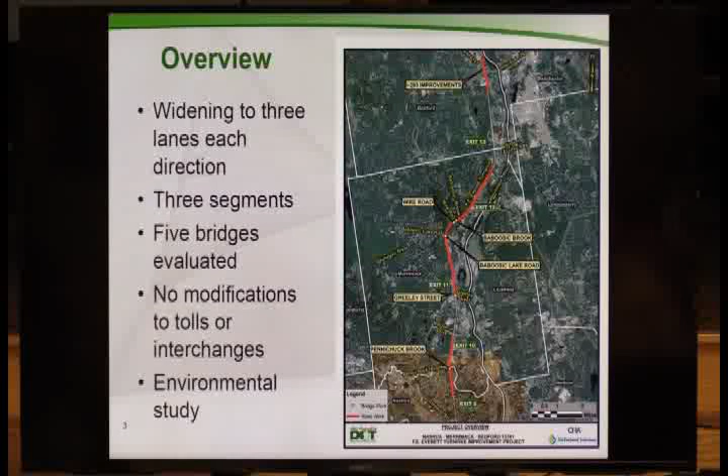That would be from exit 10 to 11 and in the exit 13 area. So the goal of the project is to improve the mobility throughout the corridor. The Everett Turnpike in this area, or for the whole state, is a major north-south corridor for daily commuting, for weekend travelers, and for just the goods and services that pass up and down. There are currently areas where the level of service is not adequate to address the amount of traffic that is on there, so we're going to help relieve the congestion and improve safety.

Let's see if I can use this. There we go. Along the corridor, the idea here is in these certain sections, we're going to improve the roadway by going from 2 lanes in each direction to 3 lanes in each direction.

Here, as you can see on the slide at the top part, is the existing condition. Between the both northbound and southbound barrel, there's a grass median with a metal beam rail. The proposed section will add a lane in each direction to the outside of the highway, so only 12 feet added on each side. But in the median, we're going to be paving the median and putting concrete barrier.

This provides a tremendous safety improvement throughout the corridor. It gives an area for disabled vehicles to get out of traffic without having to pull into a grass median, so that's a safety improvement. In addition, obviously the added lane is going to help the flow of traffic.

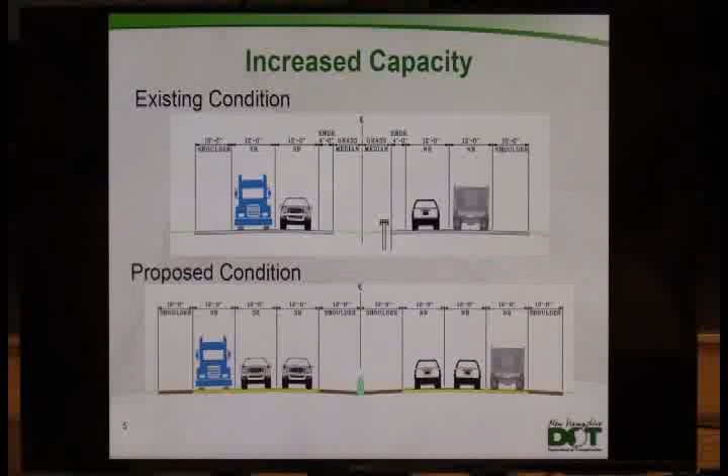I'm sorry, I want to back up one slide. Okay, so we're talking about improving the flow of traffic. Currently, at a number of locations throughout the corridor, the traffic functions at what we would call a level of service D. Now, a level of service is just a qualitative measure of how free-flowing the traffic is.

The ratings for level of service can range from an A to an F. So at a couple locations, we're actually at an F, but many of the locations are at a level of service D now. Now, when we started looking at this project, we did a traffic study, and we looked at the traffic projections. We looked at the current conditions, the conditions at the start of construction, and then we looked 20 years out as to what the traffic volumes were going to be. So what we want to do is try to solve this problem for at least 20 years.

So again, we're at a level of service D. With the improvements, we are going to get much better flow of traffic.

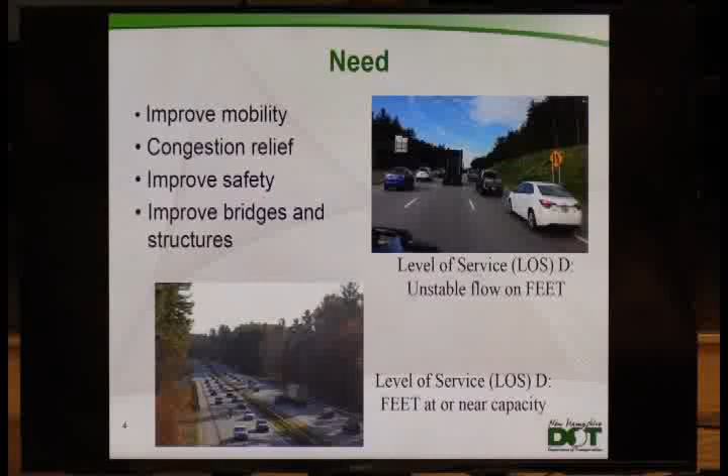Our first segment that we're going to be improving starts in Nashua, just north of exit 8, and runs to just south of exit 10 in Merrimack. This is approximately 1.7 miles long, and there's one major bridge over the Pennichuck Brook. We're going to take a look at that one.

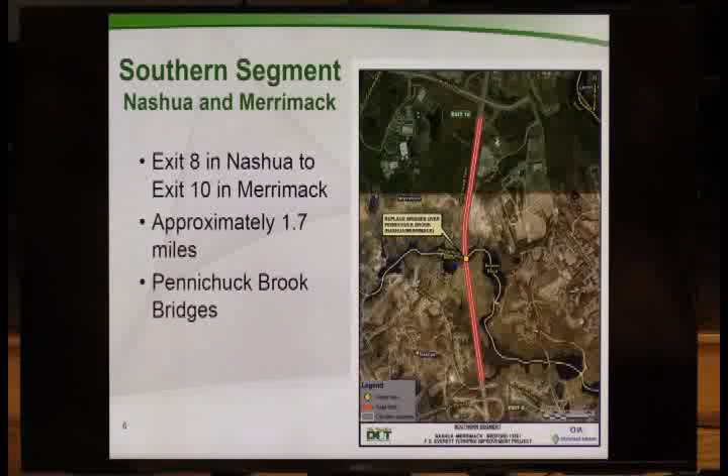So this is the bridge over the Pennichuck Brook. This area is the drinking water supply for the city of Nashua, so obviously a very sensitive area that we want to do everything we can to not have any impacts on during construction.

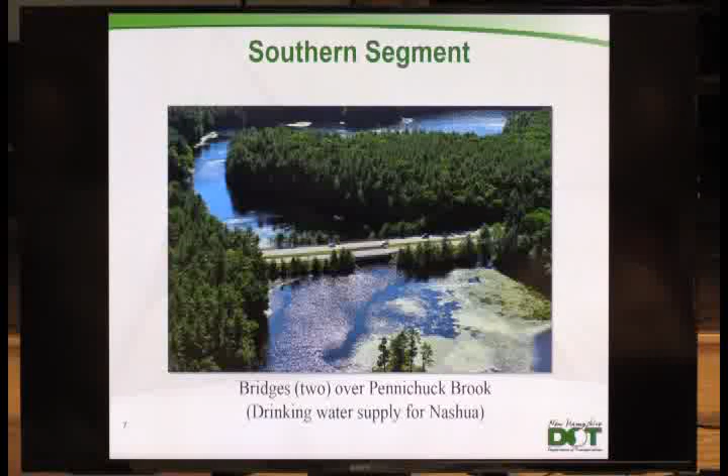So this is a view of looking down the highway, same bridge that we just saw on the other slide. As this is constructed, there's a commitment to keep 2 lanes of traffic open in each direction, and that commitment applies to the entire corridor of construction.

But for this bridge in particular, there will be the need to shift traffic back and forth. The key goal here is to minimize the environmental impacts, because it's a drinking water supply in a very sensitive area. So all of the construction in this area would be done to the east side of the highway, which is, as you're looking at this, at your right side. So all the widening will be to the right.

In addition, another measure being taken to minimize the environmental impacts during construction is that the bridge that is going to replace the 2 existing bridges will be a longer span. So the abutments or the bearings for the bridge can be built behind the existing bridges, not in the water, but in the land behind the existing bridges.

So traffic will be shifted over. A portion of the new bridge will be built to the east side. Traffic will then be shifted onto that, and the remaining part of the bridge can be constructed. The exact phasing still needs to be worked out, but again, the commitment is to keep 2 lanes in each direction open at all times.

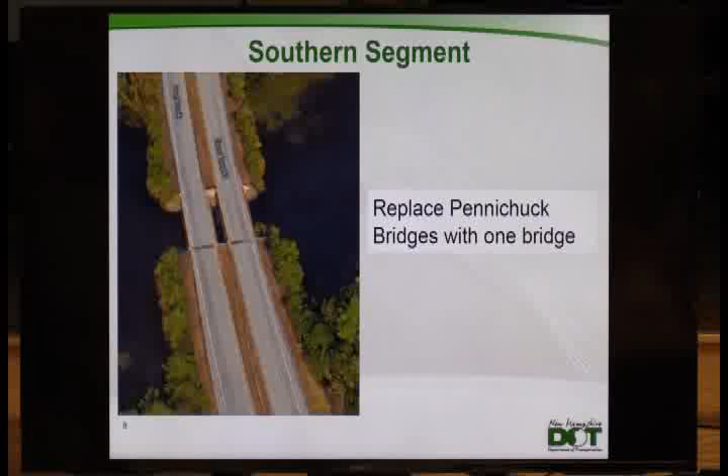So the next section is the middle segment, which is about 5.1 miles long. This starts at exit 11 and runs to just south of exit 13, the Bedford airport access road, which is still in Merrimack. So this section, 5.1 miles, is all within Merrimack. A couple of the key bridges here are Wire Road and Baboosic Lake Road, and then the Baboosic Brook Bridge.

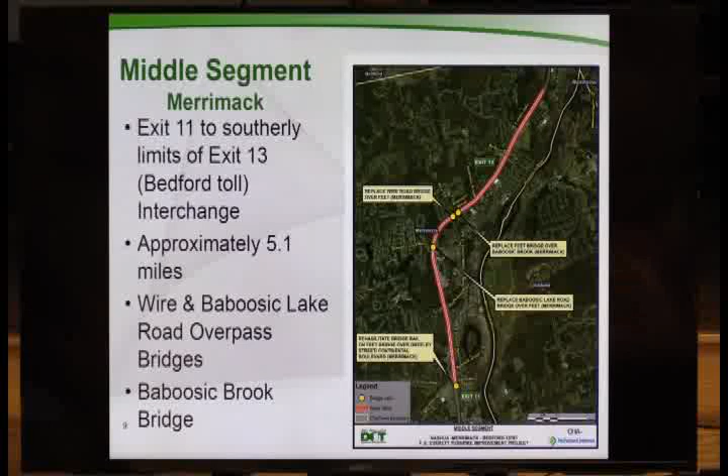This section starts at exit 11 over Greeley Street. This bridge is already wide enough to accommodate the 3 lanes in each section, so there's very minor work here, some guardrail and bridge guardrail improvements, but in essence just maintenance type work on this bridge, no reconstruction.

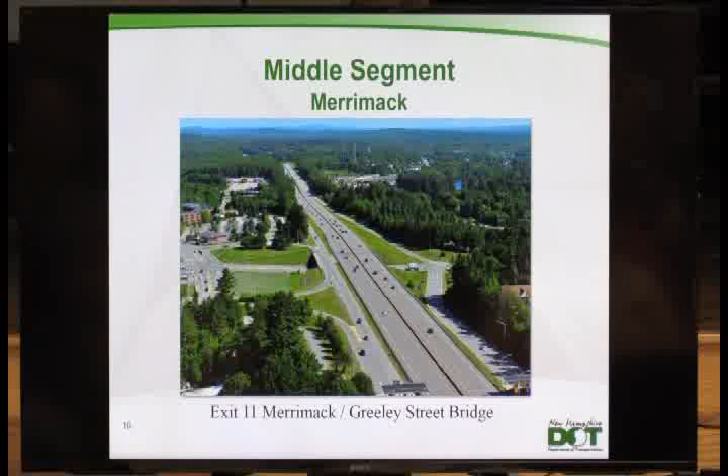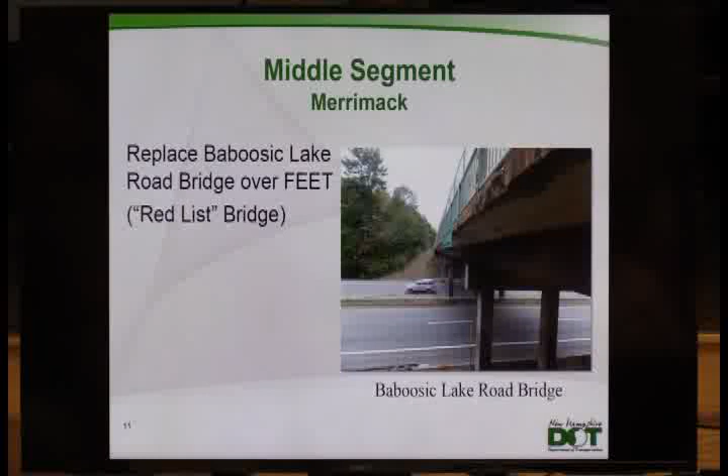For Baboosic Lake Road, which is right outside the high school, this is a red list bridge. So this bridge is going to be replaced with a new bridge. It also needs to be replaced to accommodate the new 3-lane section under that roadway.

Here you see a close-up of the plans. The bright yellow is Baboosic Lake Road and the F.E. Everett Turnpike underneath it. The greenish area is the extent of the construction, basically the slope impacts. As the roadway is raised and widened a little bit, there are impacts that come off to the side, and that's what is shown in the green area.

What will happen here is that this bridge will be replaced on its existing alignment. That will be done by constructing a temporary bridge, most likely to the south of the existing bridge. Traffic will be diverted onto that bridge, the old bridge can then be torn down and a new one constructed. The commitment here is to keep 2 lanes, or 1 lane in each direction, open for Baboosic Lake Road at all times. The only exception would be minor construction activity, but never during rush hour or peak hour traffic that would impact the schools.

One of the other commitments being made is that there's an existing sidewalk on the southern half of this bridge. That sidewalk will be maintained, but a sidewalk will also be added to the northern side of this bridge. Because of the proximity to not only the high school but the other few schools in this area, there is a lot of pedestrian traffic, so to accommodate that, sidewalks will be placed on both sides of this bridge.

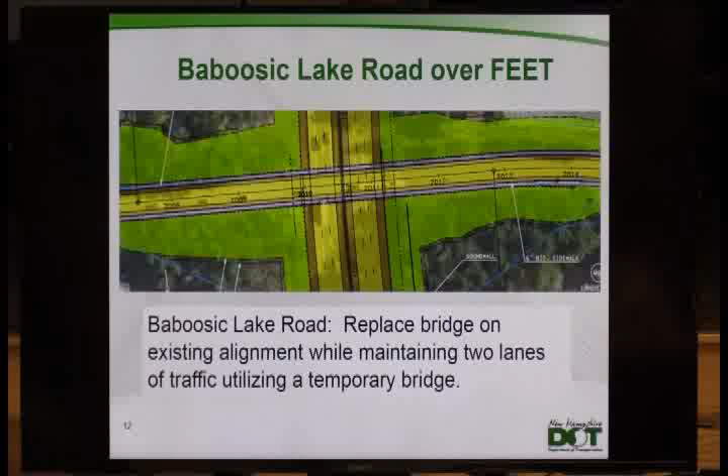Our next bridge is just a little further up the Turnpike, and that would be Wire Road. Wire Road has about half the amount of traffic that Baboosic Lake Road does, but it still needs to be replaced because it needs to be widened underneath to allow for the new 3-lane section of the highway.

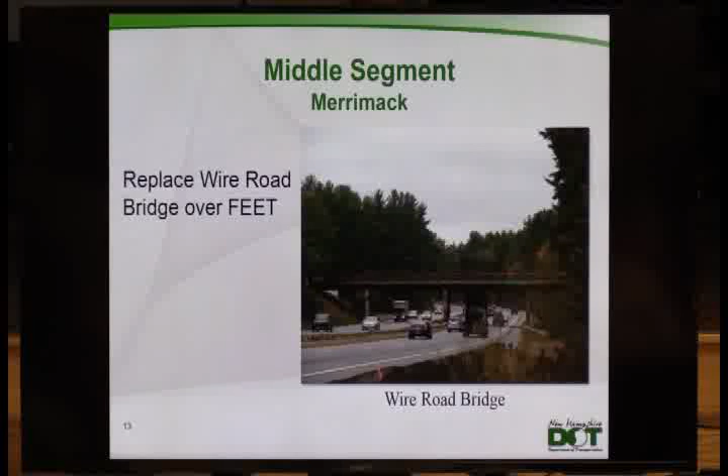Wire Road is going to be constructed using alternating one-way traffic, which means traffic will be narrowed down to 1 lane. Temporary stoplights will be placed at either end of the bridge, and traffic will flow one direction, then the lights will change and traffic will flow the other direction. This decision was made based on the lower traffic volumes on Wire Road, which could be accommodated using this type of approach. So the existing bridge will basically be cut in half longitudinally down the length of the bridge.

The northern half of the bridge will be demolished, and a new bridge will be constructed, and then when all construction is done, traffic will be placed on that new bridge. This approach was taken because there are some very tight environmental restrictions in the northeast corner of the bridge. Baboosic Brook flows pretty close to this bridge, so we couldn't just build a new bridge and shift it all the way to the north, because that would have impacted Baboosic Brook.

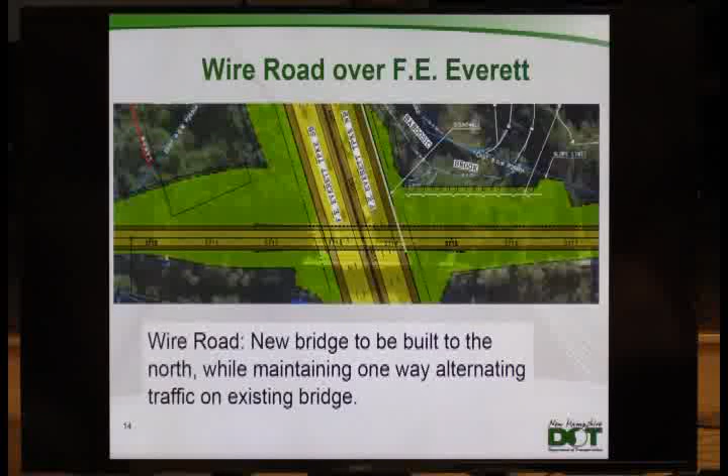The next bridge is actually over the F.E. Everett Turnpike over Baboosic Brook, just a short distance north of Wire Road. This structure is currently not adequate for the hydraulic flow that will be coming through there. At this point in the roadway, the 100-year flood is predicted to overtop the F.E. Everett Turnpike, so the roadway in this area is actually going to be raised approximately 3 feet. This bridge, which kind of looks like a culvert but is technically a bridge, will be replaced with a longer span bridge to properly address the hydraulics and flooding issues in this area.

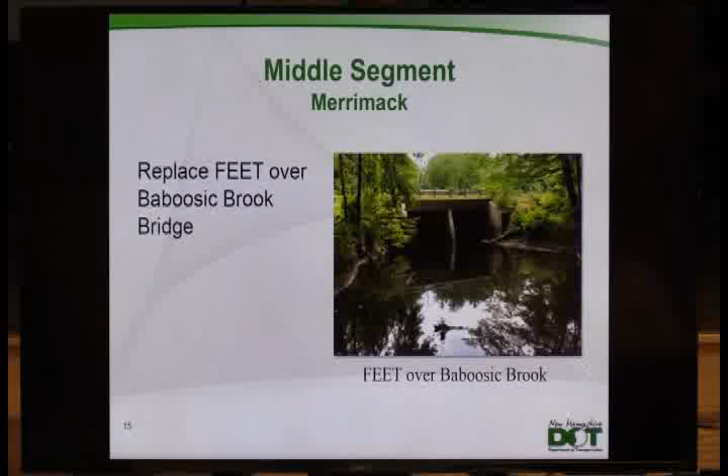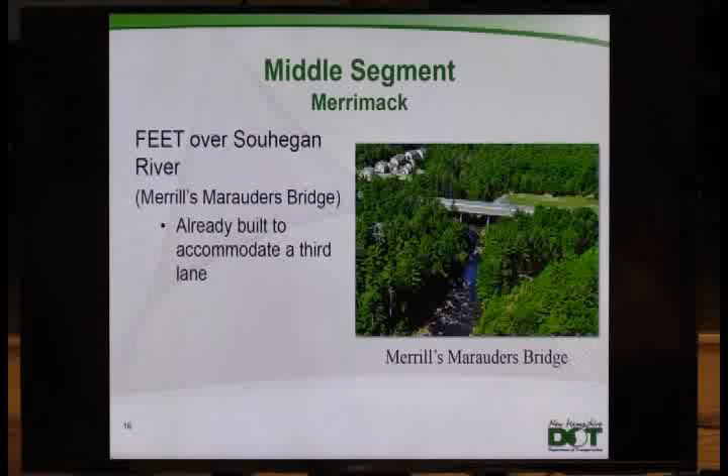The other bridge in this segment, just south of the high school, that a few people have asked about tonight, is the Merrill's Marauders Bridge over the Souhegan River. This bridge was previously reconstructed about 5 years ago, so it's already wide enough to accommodate 3 lanes of the highway. There really is no work needed on this bridge, with the exception of restriping the road and maybe repaving over it. So really no structural work on this bridge.

So our last segment is the northern segment. This is approximately 1.3 miles long, starting just north of the airport access road and going through the 293 interchange. There are no bridges to be constructed on this section of roadway.

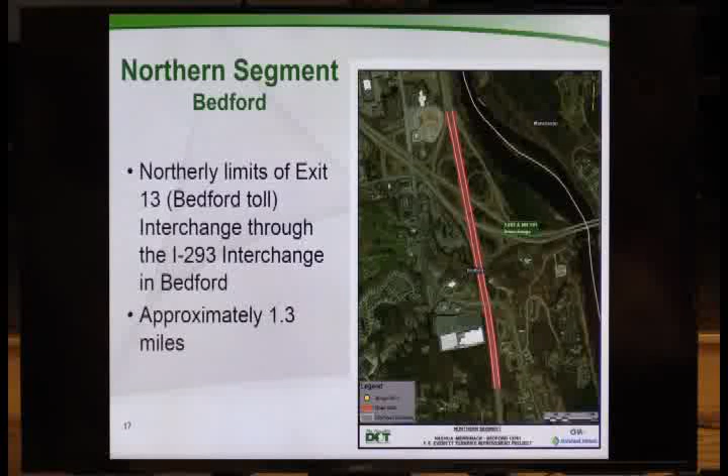There are a couple bridges here that we just want to point out, so it's clear we're not going to be working on them. There's the new bridge, Route 3 over the F.E. Everett Turnpike, right by Lowe's in Bedford. That bridge is pretty new; it was built to accommodate a wider F.E. Everett Turnpike underneath, so there's no work on that bridge at all. The last bridge is the 293 over the F.E. Everett Turnpike, and that is built wide enough to accommodate the 3 lanes through this.

What about the one at exit 12, Bedford Road? Bedford Road is already wide enough to accommodate the 3 lanes underneath it.

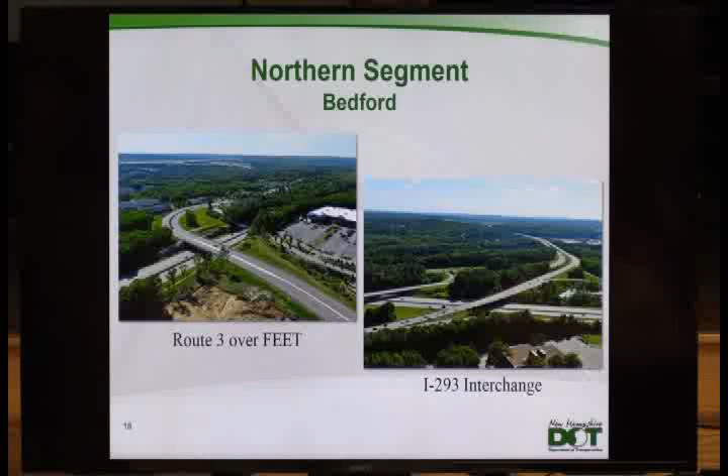So here again we have the plan view of the terminus of the northern section. What we want to show here is that we're carrying the 3-lane section, 3 lanes each way, through this interchange, and tying into the existing ramps. We're not rebuilding these ramps to 293, but tying into what's there, carrying that 3rd lane through to hopefully accommodate and facilitate the flow of traffic underneath, and all the weaving and merging that goes on with traffic coming off of 293 or 101 onto the F.E. Everett Turnpike to the north.

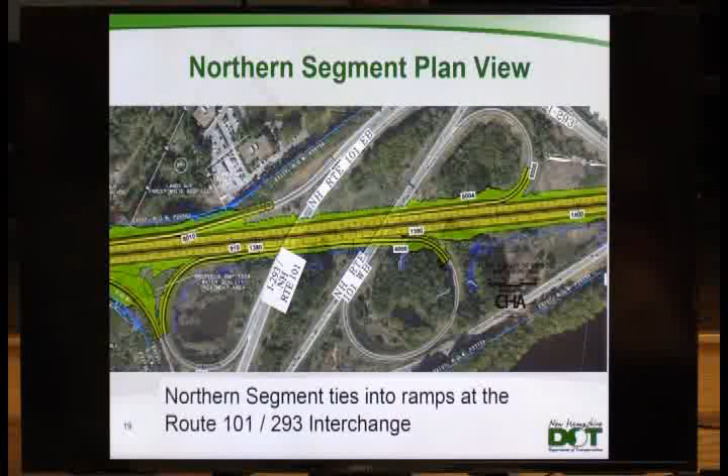So, with that, I'd like to turn it over to Jed to talk about the environmental issues.

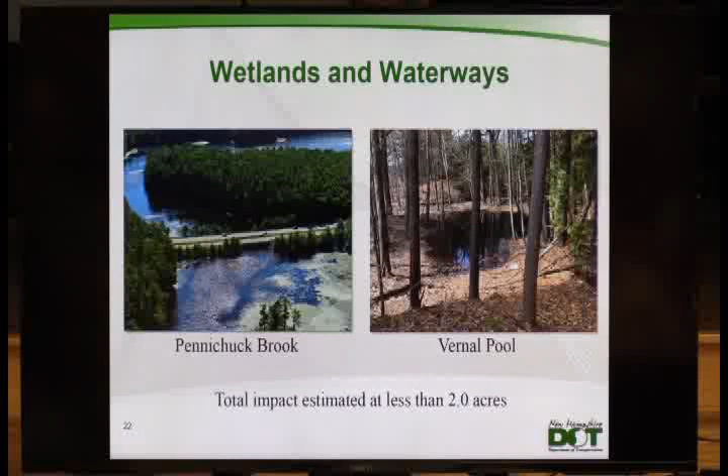Water quality regulations are fairly stringent these days. They require us to treat as much as possible of the runoff from both the existing and proposed pavement. We're proposing approximately 20 extended detention basins to treat runoff from the highway. We think the treatment will result in better water quality in runoff and receiving waters than there is currently, because so much of the Turnpike currently drains off untreated.

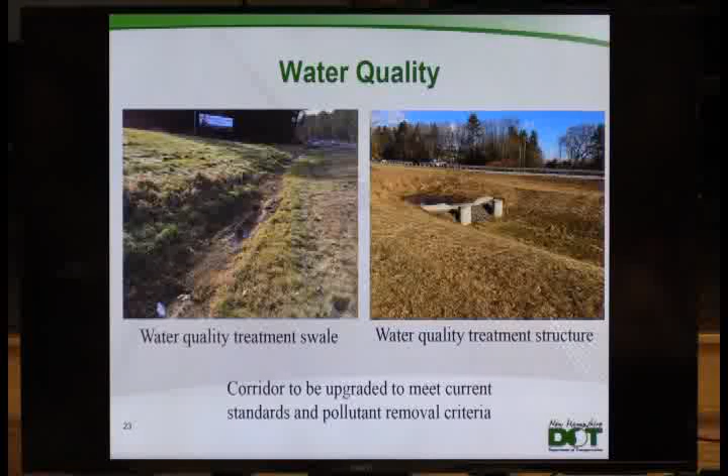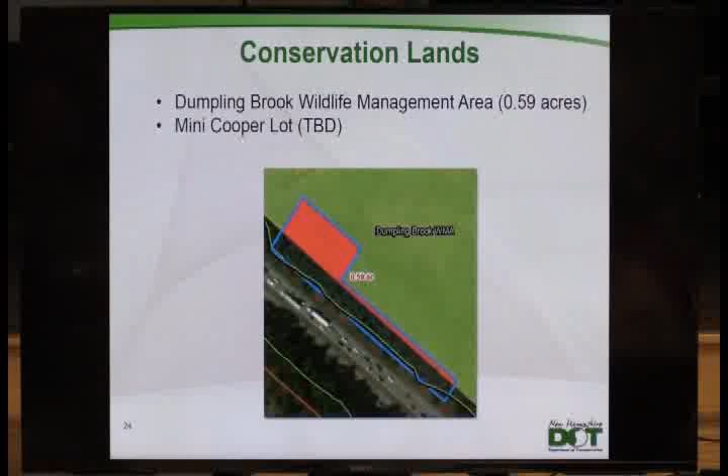There will be a couple of conservation lands affected. The Dumpling Brook Wildlife Management Area, we're proposing to impact about two-thirds of an acre to construct one of the detention basins. There's also a recently designated conservation area. We're investigating who holds that conservation easement at the Mini Cooper lot up in Bedford.

And finally, noise. I know there's a great deal of interest in noise tonight. We looked at the entire corridor for noise impacts from exit 8 in Nashua all the way up to the 293 interchange in Bedford, including the areas that were previously widened.

We're employing the traffic noise model to determine impacts. That's a model developed by the Federal Highway Administration and is the standard model for determining noise impacts throughout the country. The first step in that process is verifying that the model is giving you accurate results.

So to do that, we go out to individual neighborhoods, and we identified 24 different neighborhoods along the Turnpike. We go out to each neighborhood, go to a location that's close to the highway and accessible, measure the noise levels on the ground, and simultaneously count traffic volumes.

We put the traffic volumes and the geometry of the site into the traffic noise model and determine what the model tells us the noise is. We compare that to the measured noise levels, and if they're about the same, then we know the noise model is giving us accurate results. The model is validated. In all cases, we did get results close to the measured results, and the model did prove to be accurate.

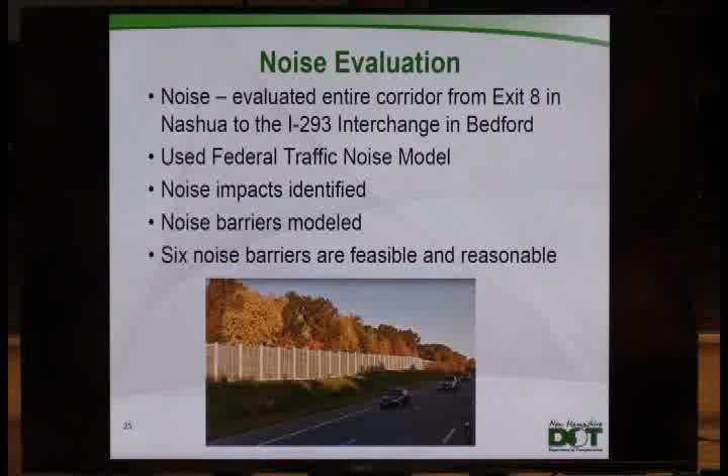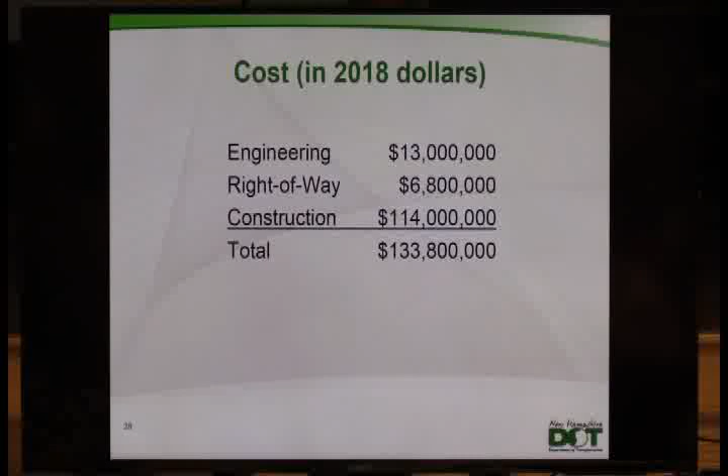There could possibly be municipal funds involved in the contract if, let's say, there was something that needed to be replaced that was a utility the town wanted to replace - let's say they wanted to upgrade a water line or sewer line. That would be a town expense. But as of right now, we don't have any of those included in the total cost of the project.

Excellent question. So the project could go in a number of different ways. When we do projects at the department, we have three different types of projects we could do. We could do something called design, bid, build. That's a regular standard project that you would see - we design it, we put it out to bid, anybody gets to bid on it. You'd come in, purchase plans, and bid on the project, whoever the contractor was. It's not like we're aiming for it to be contractor A or contractor B.

The second way is a design build contract, where we put out general criteria. We need you to come up with a design firm and a construction firm, get us something, and we need it on the road by such and such a date.

The last one is a CMGC, a construction manager general contractor, where a designer and a construction firm team up and do the whole design. If they're the successful bidder on the contract and come up with an agreeable bid, they get the contract. Right now we're looking to do this as a design bid build contract, where we put it out to advertise. Does that answer your question?

Very good. So the process and schedule - we're in the preliminary design stage of our process. The environmental study will be published this summer, part of that preliminary stage. We'll have the public hearing in 2018, and that sort of ends the preliminary design stage.

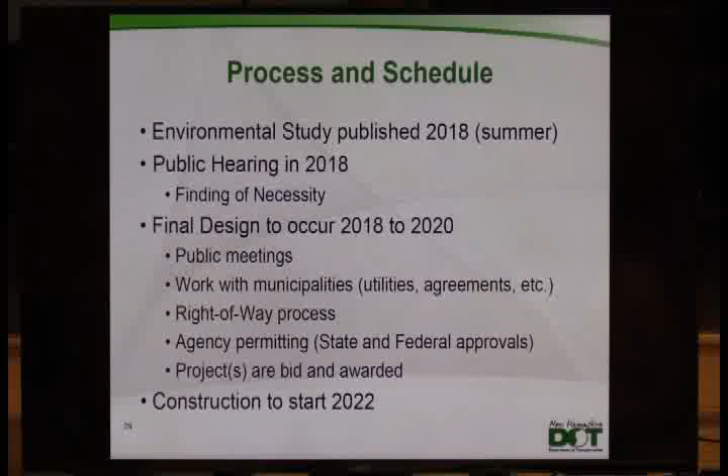Basically, once we get into final design, we'll make those decisions based on where we can get the permitting from, where we've got information, and where we can start the projects first, because the goal is to get something on the ground quickly and to you as soon as we can, since we've heard from you tonight that traffic and congestion are a problem.